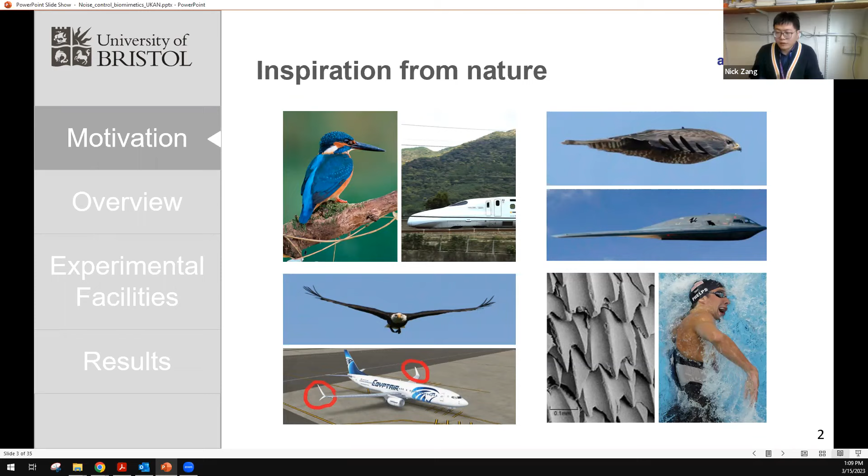So just very quickly about the background. Why are we interested in bioinspired features? Because it is firstly abundant in nature. We can draw inspiration from a myriad of plants and animals, and they have been proven to work very effectively over the past 100,000 years. So these features are really useful or inspiring in terms of all different aspects of flow control, including noise control. So here are some of the examples. I'm not going to go through them, but we have seen a lot of good and effective ways to control flow and control noise from bioinspired features.

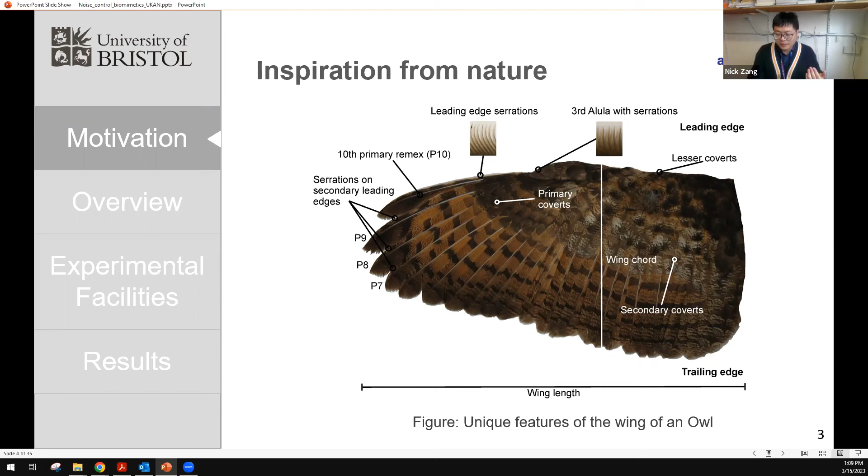For us, mainly in Bristol, we work, I have to say 90% of the time, on a single animal called the owl. So we derive a whole lot of different features from the wing of the owl, including leading edge and trailing edge serrations, including the finlet treatment, which I'm going to mainly talk about shortly, and also other porous and feather features. So this is the primary animal we're looking at to draw inspiration from.

Before I go into that specific topic, I would like to just quickly show you the activities that we're doing at Bristol. It mainly separates into noise generation mechanisms, noise mitigation strategies and the study of noise control, as well as the advanced measurement techniques as mentioned. So there are a whole lot of measurement techniques that we are able to further develop to help us better understand both noise generation and noise mitigation in our applications.

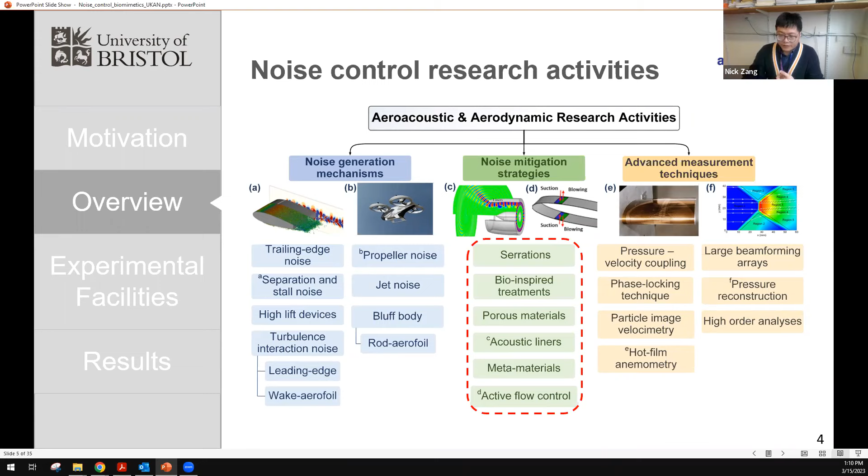And our tool or arsenal, if you may, is two aeroacoustic wind tunnels. The first one was built and commissioned back in 2017, 2018, and it became the National Aeroacoustic Wind Tunnel Facility, and it has been heavily used at the moment. This wind tunnel is anechoic down to a frequency of 160 Hertz, and it has interchangeable nozzles, meaning that depending on the problem of interest, we can either make use of a letterbox nozzle, which goes up to a free stream velocity of 120 meters per second, or we can make use of a larger rectangular nozzle, which is what we have used in most of the studies. The dimension shown here is about 77 centimeters by 50 centimeters. So it's a medium-sized nozzle.

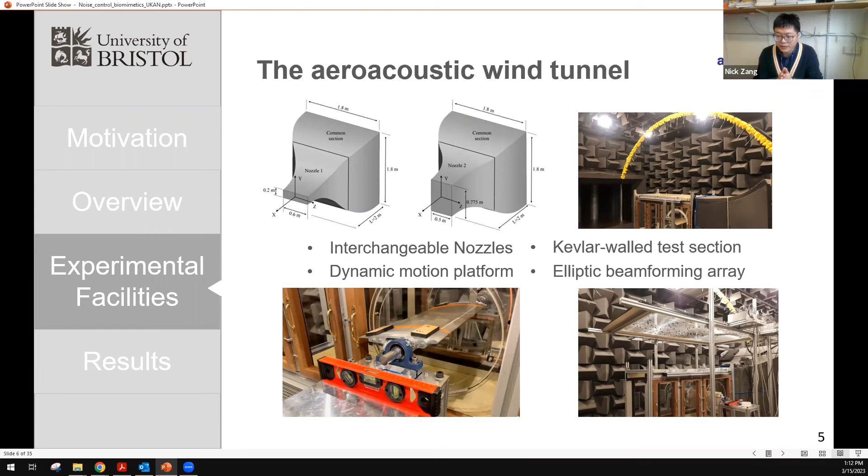And within the anechoic chamber, we have developed several techniques. For instance, we developed a Kevlar wall test section, suitable for airfoil trailing edge noise measurement. And we have developed beamforming arrays, which are able to capture noise frequencies down to 300, 400 hertz. So these are basically the tools that we're going to use. Just quickly to jump into the second facility that we have recently commissioned.

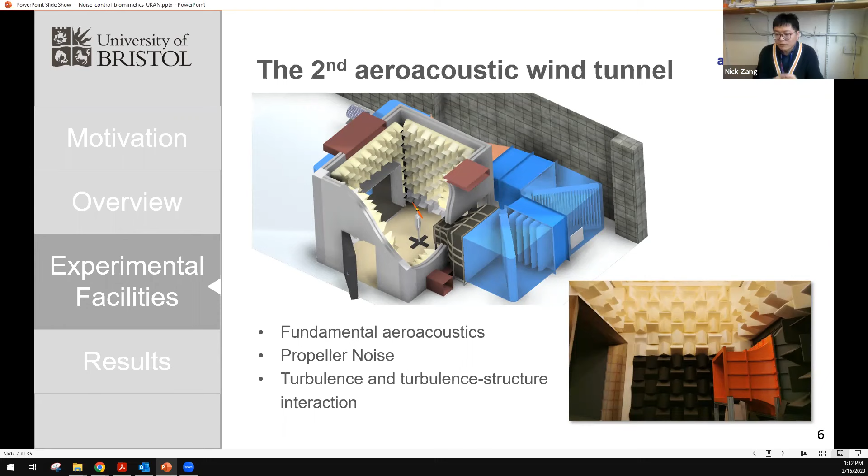So this is a slightly larger aeroacoustic facility, but it's dedicated, or more or less dedicated, to propeller noise, because it has a larger cross-section, and also it has a unique capability where it is able to suck the wake of the propellers gently out of the tunnel and balance the pressure afterwards from the top. So essentially, it's a pressure balanced or pressure neutral, as we call it, aeroacoustic tunnel. So we do look forward to more studies or results to share with you in the future.

Using these techniques, the group at Bristol has improved the frequency response and the way that we calibrate these sensors over the years. So now we are able to say with confidence that we can quantify the wall pressure fluctuation and the near field relatively accurately with this type of technique, and map the entire near field pressure fluctuations on the model of interest that we test. So this is one of our primary tools, as I'm going to show you shortly, that we use to understand how the near field can be correlated to the far field noise.

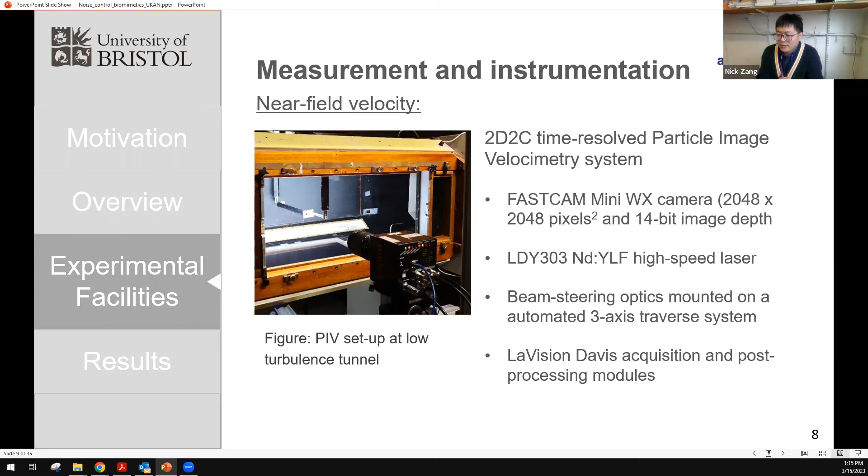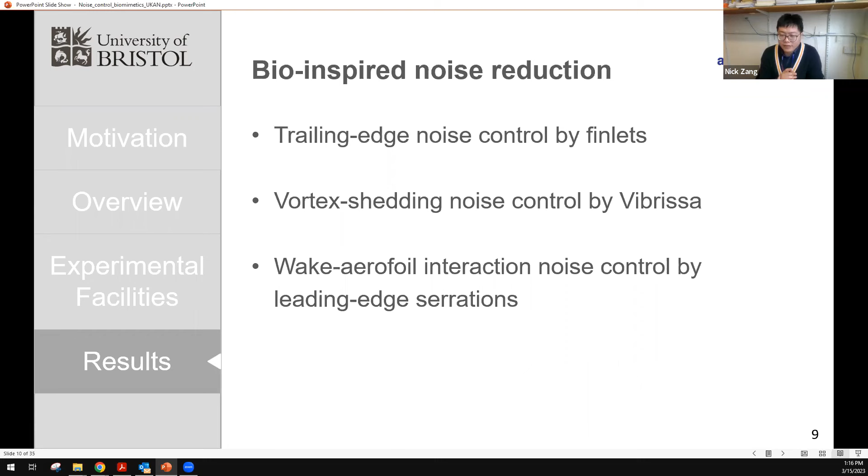So, right, let me go to the real discussion, the real results. I would like to discuss three types of noise control applications that we have studied. The first one is trailing edge noise control by bio-inspired finlets. The second one is the vortex shedding suppression of aeolian tones, or vortex shedding noise, by a vibrissa cylinder. The last one is wake-airfoil, so turbulence leading edge interaction noise control by leading edge serrations. Let me go to the first one.

So in here, we set out to tackle one of the most prominent noise sources usually in aviation, the trailing edge noise. The trailing edge noise is usually generated by the turbulence eddies convecting past the solid trailing edge. And the scattering of the noise, if you have ever measured it, is quite difficult to measure in labs or in the acoustic tunnel, but it is quite loud in real engineering applications. So this is the very first part we set out to try to understand and suppress.

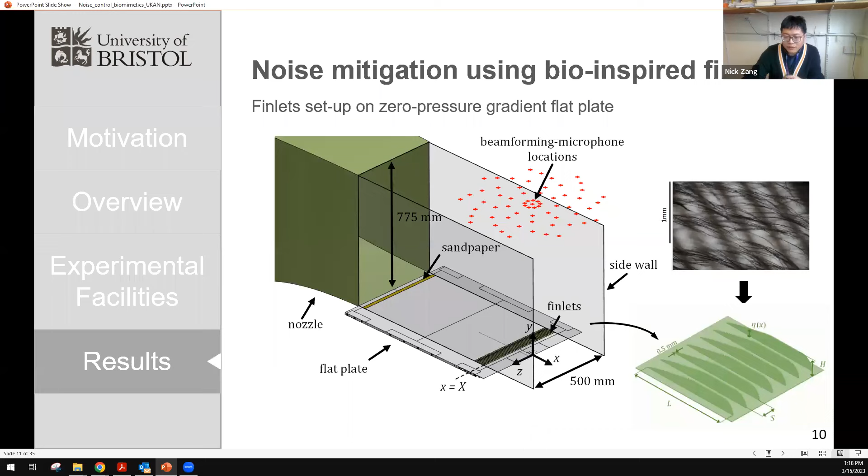So firstly, flush with the trailing edge, and then secondly, we gradually move our Finlet treatment upstream to see the effect of bringing it slightly further away from the trailing edge and how much it is able to further reduce trailing edge noise. As later, I'm going to show you that it is effective by bringing it a bit further upstream.

Right, but before that, what we want to know is how the Finlet acts, or how effective the Finlet is when applied on a zero pressure gradient boundary layer. So the first test case is that we apply the Finlets onto a flat plate, and the flat plate is 1 meter long and is mounted flush to the nozzle exit lip. So it's here, so it's flush.

And then the flat plate is tripped with sandpaper to ensure that the flow remains canonical over the entire flat plate. We did some boundary layer profile characterization first. So it does show that the profiles follow the standard canonical boundary layer development.

And also the pressure coefficient is shown underneath. That basically shows the pressure coefficient does fall into the expected standard deviation of a zero pressure gradient boundary layer. So this is the first step to ensure that we are not adding additional effects on the study of the Finlets.

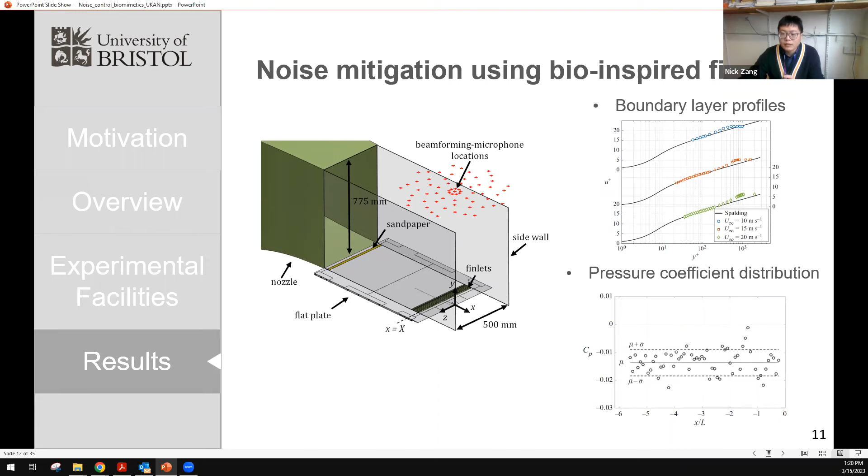So to move on to the actual results, first of all, we perform a far-field noise measurement using beamforming arrays. The beamforming array does provide us with knowledge of the far-field noise in a 1/3 octave band. So it doesn't show the normal PSD spectrum that you expect, but it's relatively more integrated.

What the far-field noise measurement tells us is that indeed, the Finlet is effective in terms of suppressing or reducing trailing edge noise. Sorry, I probably should have explained here that H is the height of the Finlet. Let me go back. And S is the separation of the Finlet. So over here, we name our Finlet with the geometric profile of the Finlet.

So H12 S6 L65 means that the Finlet is 12 millimeters in height, 6 millimeters in separation, and 65 millimeters in total length. This is somewhat decided by our boundary layer thickness. So the boundary layer is approximately 15 millimeters at the end of the flat plate.

So about 0.7 to 0.8 of the boundary layer thickness is what we have chosen for our Finlet to be. And this chosen parameter is able to yield us about 3.5 decibels of noise reduction for the trailing edge noise.

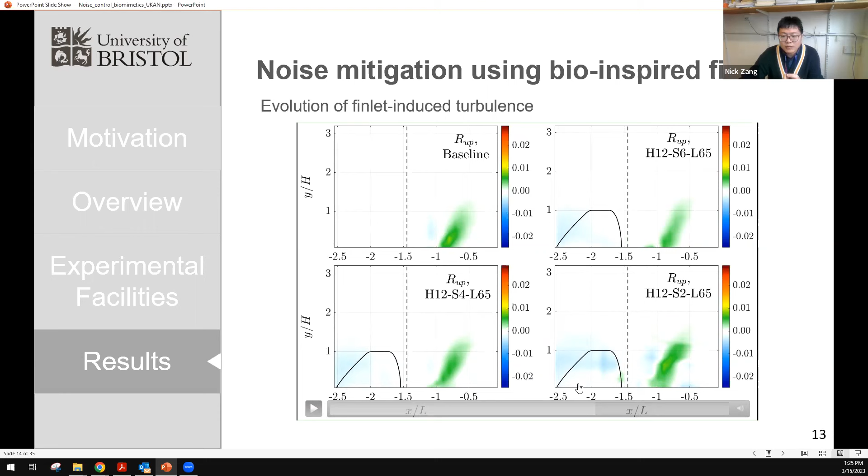So this is a kind of turbulence mixing or turbulence interaction that is directly a result of the finlet-induced turbulence. Let me go to the next slide to explain myself clearer. So this is one of the pressure-velocity correlation analyses that we performed at two locations, one at the middle of the finlet, or close to the entrance of the finlet, with a pressure sensor close to the middle of the finlet.

So from here, we are able to discern two cross-correlation peaks. These correspond to two different structures, which we have seen earlier. One is very close to the finlet ridge, the turbulent structures induced by the finlet itself. The other one is close to the surface of the wall, which is also potentially due to the presence of the finlet and its modification to the boundary layer structures close to the wall. These are two distinct structures, and they sustain their so-called independence as they convect downstream.

However, as these turbulent structures move past the finlet and continue to convect downstream from the exit of the finlet all the way to the trailing edge of the flat plate, we see in this top view that these structures start to merge. The merging occurs not only in the vertical direction, between the outer and the inner layer of the boundary layer, but also between different finlet units or finlet cells.

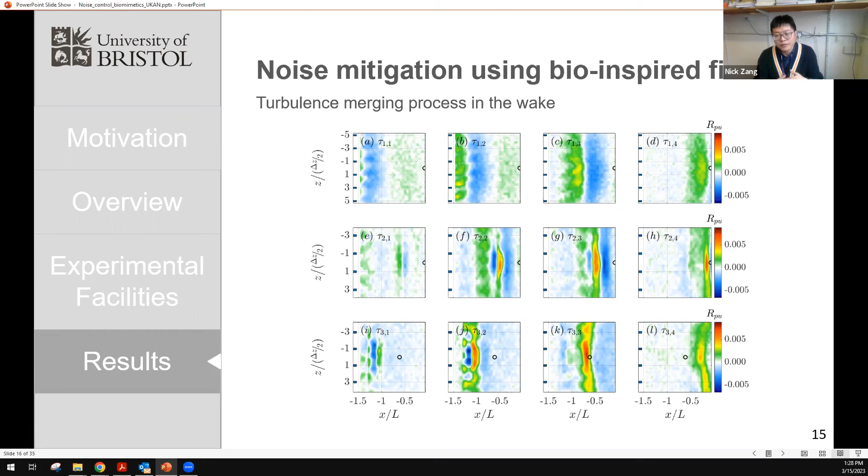And now we see that the finlet actually works for zero pressure gradient cases, a flat plate. That is brilliant. But what if we apply it to something more practical? For instance, the NACA 0012 airfoil. Sorry, I know we have studied so much about it, but this is the very first airfoil everyone tests. So when we apply the finlet treatments close to the trailing edge of the NACA 0012 airfoil, we realize that it does indeed produce the same phenomenon.

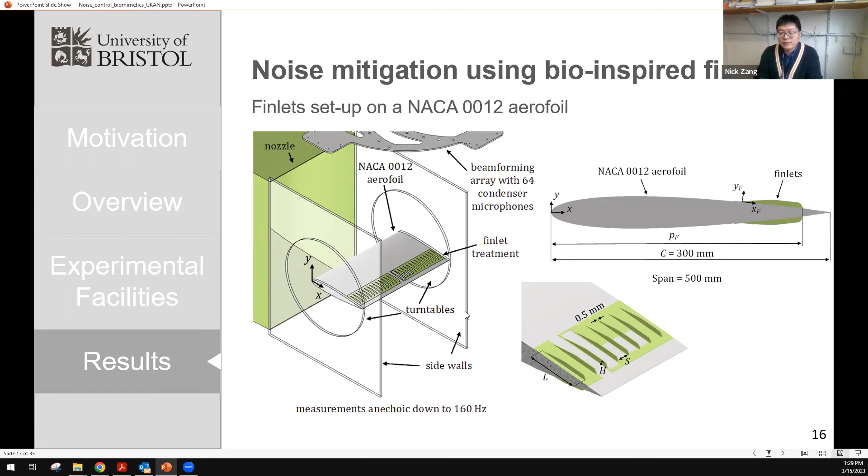First of all, about the impact. We have to quantify the impact of the finlet on the aerodynamic performance.

With reference to the pressure coefficient and the lift, we can safely say that the presence of Finlets does a very minimum modification to the pressure coefficients across the pressure and the suction side. So essentially, it doesn't really affect significantly the lift generated by the airfoil.

However, I have to admit that through our studies, we realized that the drag is potentially something that will increase. So this is kind of the compromise that we are getting by reducing the trailing edge noise, but getting a bit of worse performance in terms of CL over CD, so lift to drag ratio.

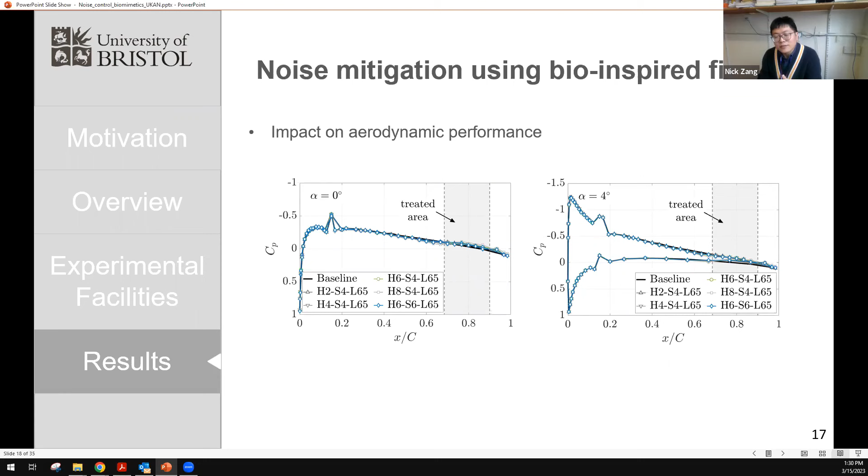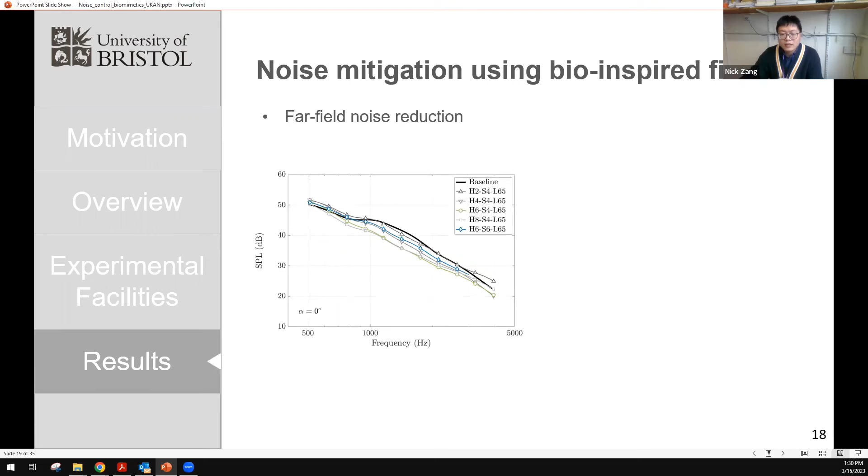However, coming back to the purpose of the study, we're looking at the far field noise reduction by applying the Finlets to a NACA 0012 airfoil. We do see that the effects are really close or similar to what has been demonstrated for the flat plate. So the noise reduction is indeed about 3 to 4 decibels, which is kind of significant for trailing edge noise because they are low in the first place.

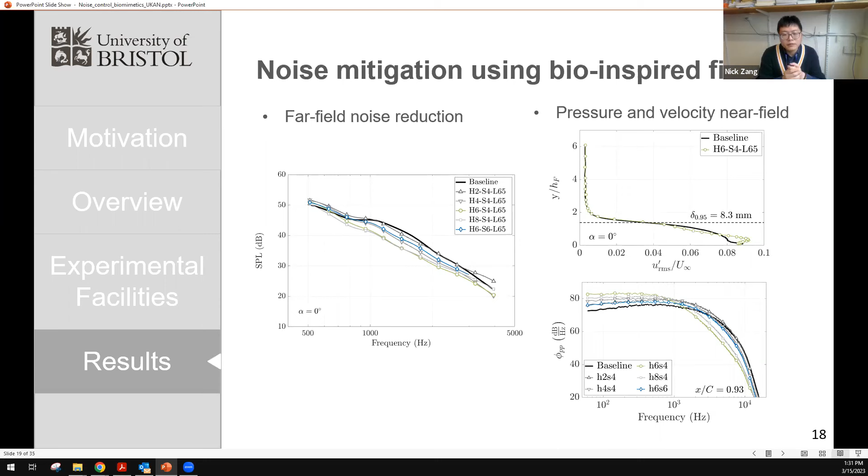Also, the reduction, again comparable to what we observed for the flat plate, mainly occurs over the mid to high frequency range. At low frequencies, you see actually some noise increase. But overall, if we integrate it as an overall sound pressure level, the reduction still outweighs the increase at low frequencies.

So just to add on top of what I have mentioned, the physics seems to be really similar to the flat plate. We are observing two systems of turbulent structures, and they are interacting. So as confirmed by our flow measurements, we think that putting the Finlet slightly upstream of the trailing edge will be the most beneficial. And indeed, we did a parametric study of the Finlet locations with reference to the trailing edge on the NACA 0012 airfoil, and we find the optimal location for reducing trailing edge noise is approximately 0.9 chord. So we have to provide certain distance for the turbulence mixing or merging action to take place.

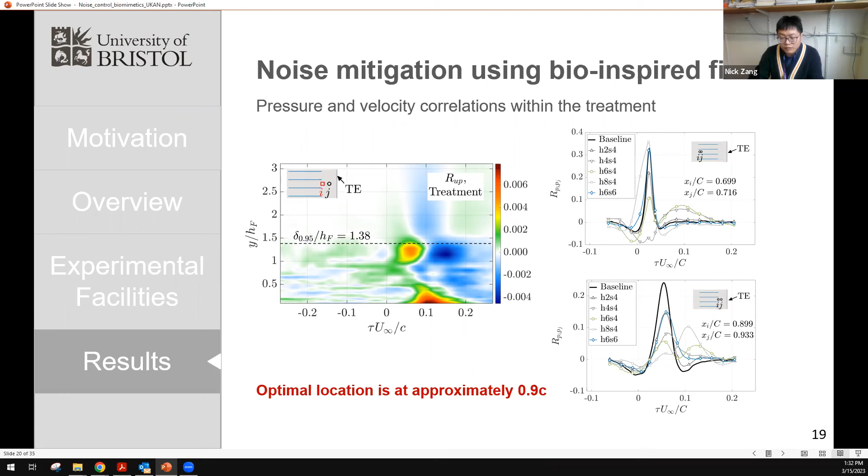So this is the first study, and this study has been recently published in Journal of Fluid Mechanics. If you're interested, feel free to ask me for a copy.

Thank you. And the second study is noise mitigation with a vibrissa cylinder. This again is a slightly different noise generation mechanism as compared to trailing edge noise. This is essentially a vortex shedding noise induced by the fluctuation of pressure over a bluff body. So over here, we have three cases. The first case is a circular cylinder, which acts as a baseline. The second case is an elliptic cylinder, somewhat similar in shape to our third candidate, which is the candidate of interest, the vibrissa-shaped cylinder.

The vibrissa-shaped cylinder is derived from the whisker shapes of the harbor seal. It's quite fascinating how scientists have taken an interest into a small portion of the hair and realized that it actually has very interesting properties with respect to fluid mechanics. These three cylinders are manufactured from 3D printing, and they are painted black because we need to perform PIV measurements on them.

All three cylinders have a hydraulic diameter of 22 millimeters, and the ratio of major and minor axis are similar. By similar, I'm referring to the major to minor axis ratio of the elliptic cylinder to that of the vibrissa cylinder.

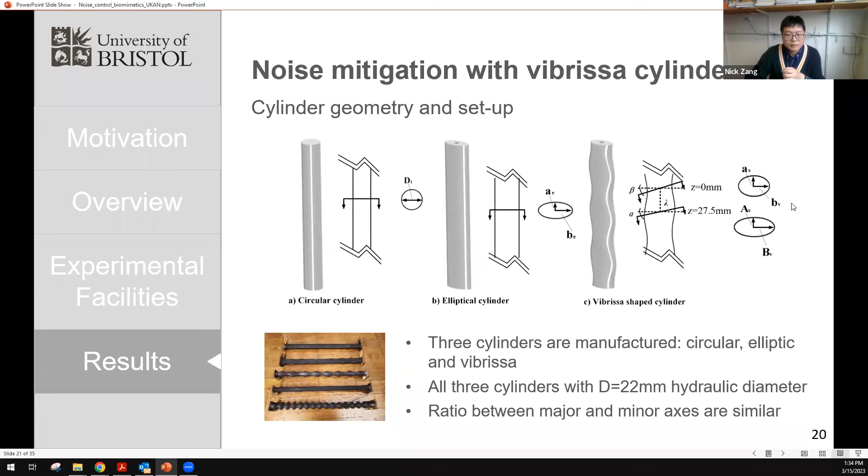And this is the experimental setup. It is quite straightforward as compared to a Kevlar-walled airfoil test section, but it does provide us with good access for the noise measurement. The cylinder setup has been measured over a free stream velocity range of 10 to 30 meters per second with an interval of 5 meters per second. And the noise can be directly measured by an overhead microphone array instead of a beamforming array. So this is a lot easier in terms of noise collection.

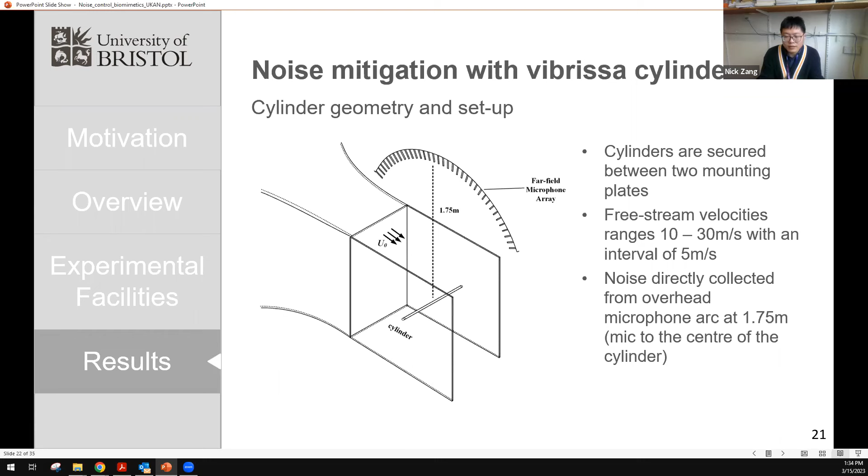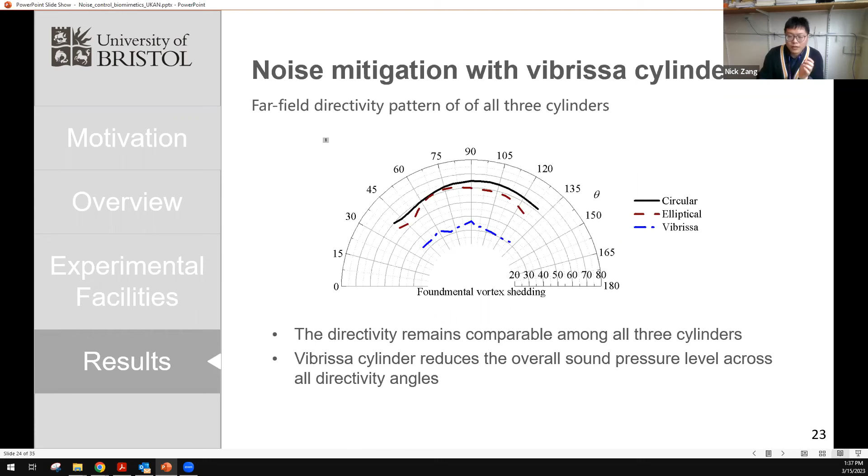And this is the far field directivity pattern. I'm going to just quickly go through that. So it doesn't really change between all three different cylinders, but again, it confirmed that the wavy cylinder is very effective at suppressing the cylinder noise or vortex shedding noise across the entire polar angles, from 35 degrees all the way to 130 degrees.

And then we performed a very comprehensive flow measurement with particle image velocimetry. So we put it into the tunnel and then measured it with a 2D PIV system. These are the first order flow field results that we obtained. In the wake, we see that the wake has become more or less suppressed for the wavy cylinder as compared to the baseline. So the baseline is the circular cylinder.

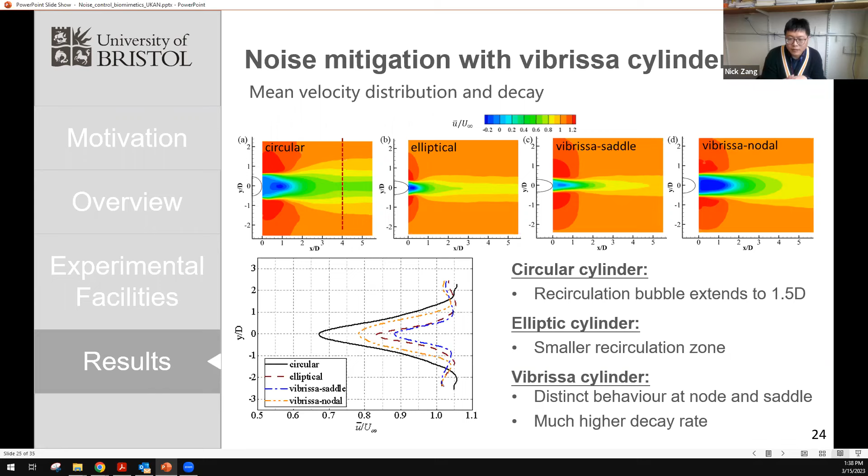And furthermore, if we perform a proper orthogonal decomposition on the flow field in the wake, we see that the wake of the circular and elliptic cylinders consists of a very high energy vortex shedding mode in the first two modes. But for the wavy cylinder saddle and nodal planes, essentially the trough and the peak planes, we do see some form of dominant energy here, but it's far less than the circular and elliptic ones. So this is what we find out.

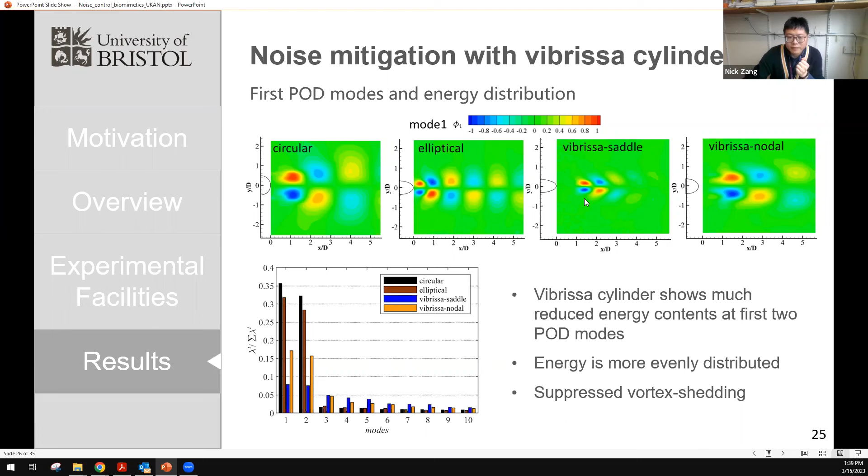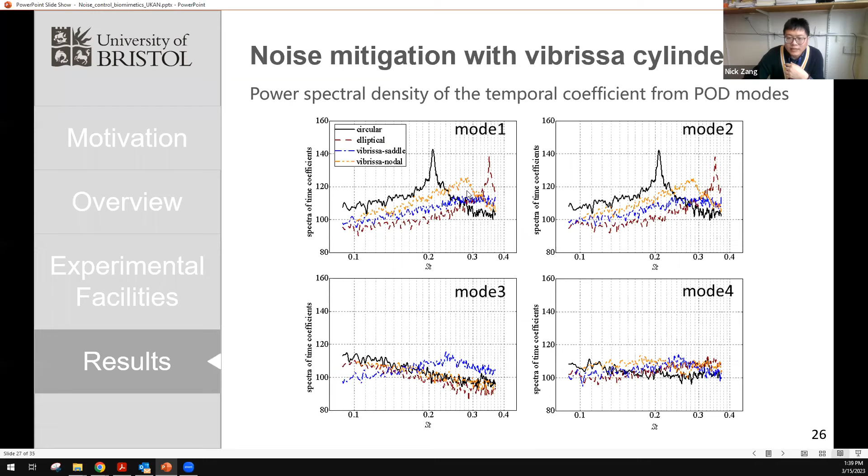So we set out to say, okay, there are still some structured shedding perhaps, but are they really shedding? If we analyze the power spectral density of the temporal coefficients from the POD modes, we do see that the peaks correspond very well for circular cylinders and for elliptic cylinders, but for wavy cylinders, it looks more like a broadband than a peak.

And further, from the POD analysis, we see that there could or could not be a clear vortex shedding for wavy cylinders. So what if we do some cross-spatial correlation to see if the structures are really correlated with each other, as would be expected for shedding?

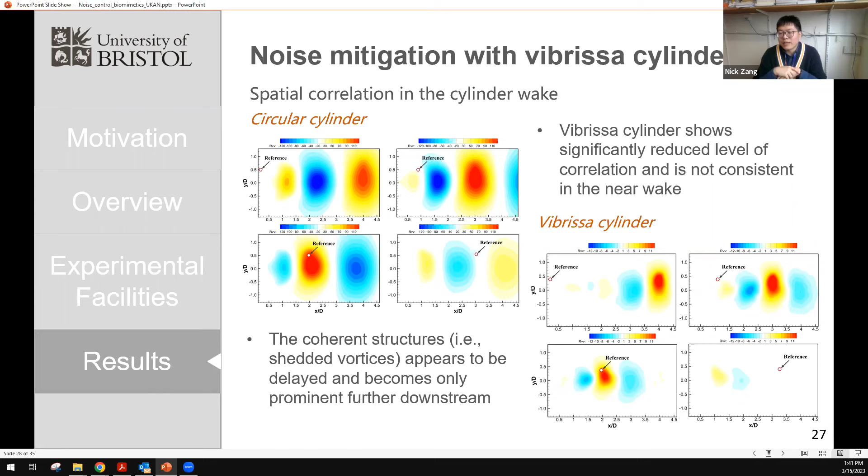And secondly, they become less organized. Regardless of the location of the reference, the circular ones are quite organized. But for vibrissa cylinders, they become rather disorganized, or not really disorganized, but sporadic in that sense. So this is the spatial behavior of the coherent structures behind the vibrissa cylinder. This basically agrees with what we have seen, that they are not so correlated, so the structures don't seem to be a very regular shedding. And what about in a temporal sense?

So if we study the intermittency, or if we perform a short-time Fourier transform analysis on this wake, we see that for the circular cylinder it is a really constant type of shedding, and the shedding consists of most of the energy. And for the vibrissa, it does vary really significantly over the measurement period, meaning that they do not have a constant frequency shedding. So instead, they do have large coherent structures, but in a very intermittent way.

So if we look at the percentage, so the likelihood that we find a so-called shedding frequency, in here I have to use inverted commas. So the shedding frequency for the circular cylinder is, again, Strouhal number 0.2, but for the vibrissa, it does spread across the entire spectrum. So this is as far as we can reach in terms of our PIV measurement sampling frequency, but I wouldn't be surprised that there will be further or higher frequency coherent structures.

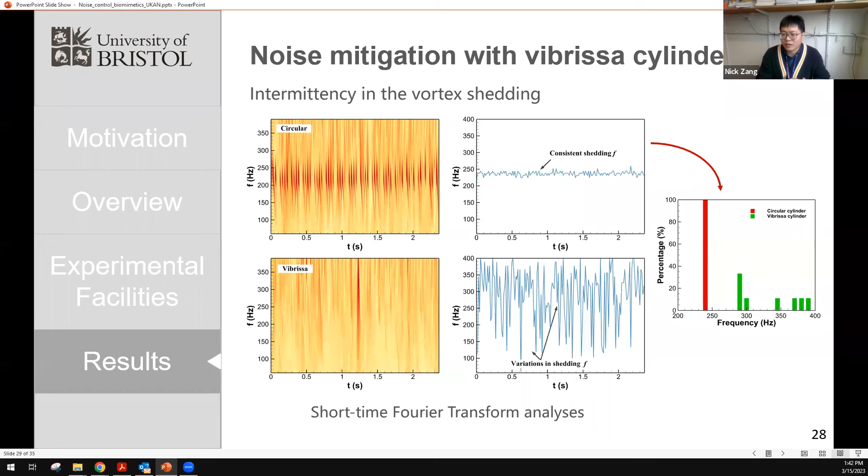So from here, we say that the reason why the vibrissa does so well in terms of controlling or suppressing the vortex shedding noise is because, first of all, in space, it delays the formation of coherent structures. Secondly, it does not produce a constant peak, meaning that it does not produce a constant vortex shedding frequency.

And lastly, I try to keep it quick. So lastly, it is a case that we studied some time ago on wake airfoil noise control. So we have a tandem setup of two airfoils, one in front of the other. And what we are interested in is a rotor-stator or stator-rotor type of configuration where the wake of the front airfoil will impinge directly upon the leading edge of the second airfoil.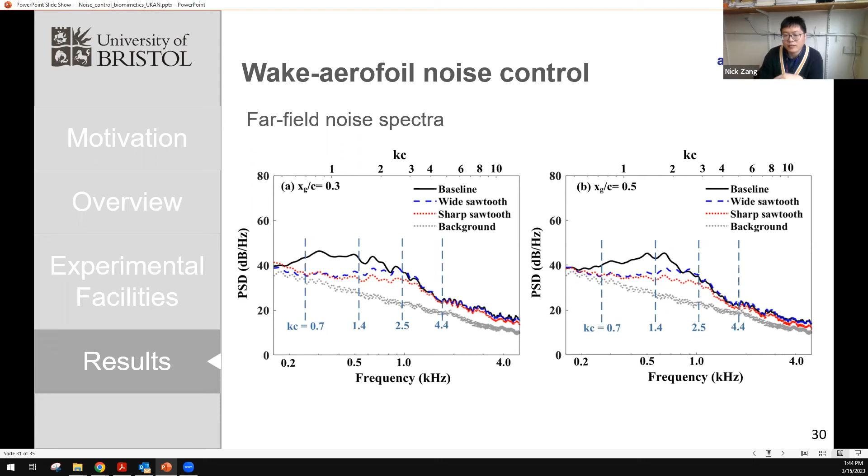So from the results, we've seen that the trailing edge serrations applied to the front airfoil show a very good impact in terms of controlling the turbulence impingement noise. It produces about 10 decibels of reduction across a frequency range of 200 all the way to about 500, and remains very effective up to about 1000, which is the typical frequency range that you expect for turbulence impingement noise. So again, the serrations do a really good job in suppressing the turbulence impingement or leading edge turbulence noise.

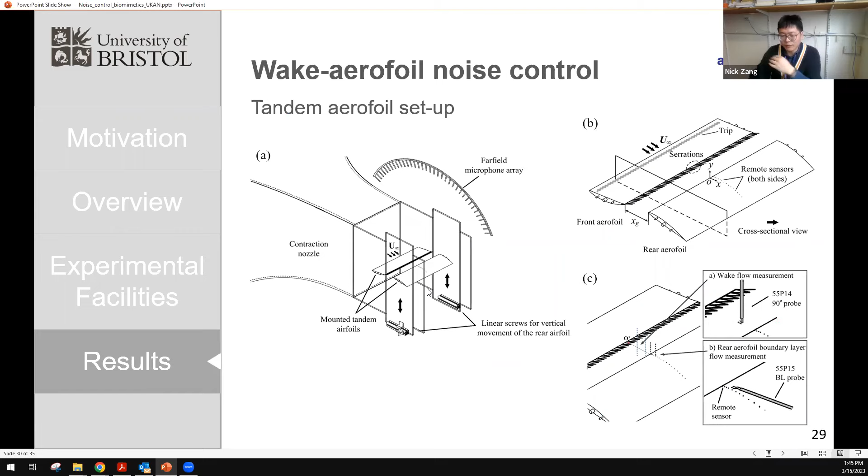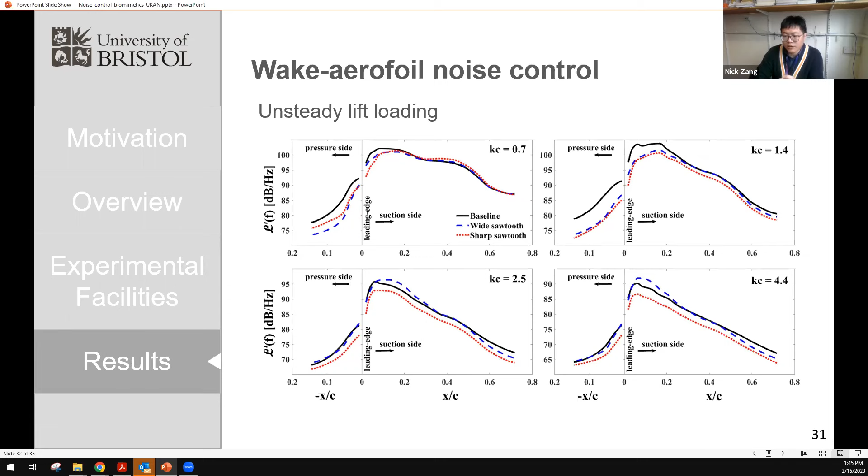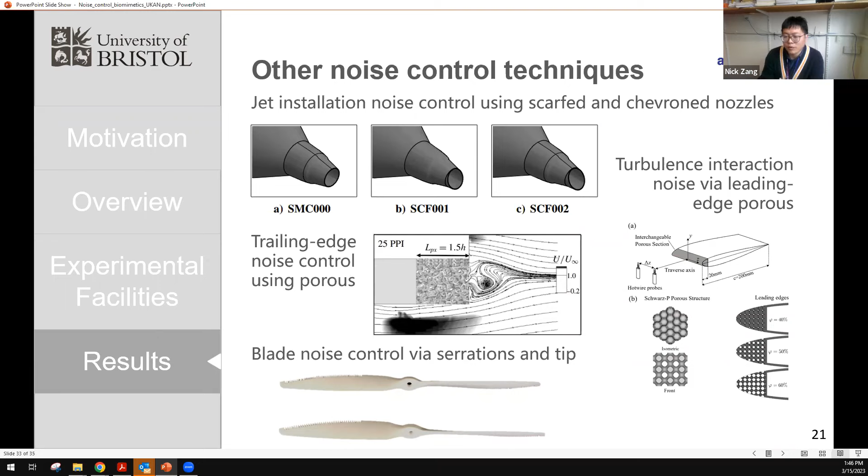So for prospective studies, as I've mentioned, we explore different bioinspired features, improve our understanding through extensive flow and pressure measurements, and correlate these features with the far-field noise. Without a good understanding of the physics of what is happening, we are not able to really optimize our noise mitigation strategies.

And of course, eventually we want to make full use of this large database that we have collected over the years and turn it into some kind of models, either neural networks, which are hot at the moment, or some form of reduced order modeling, that will allow us to better design or optimize our control strategies towards noise.